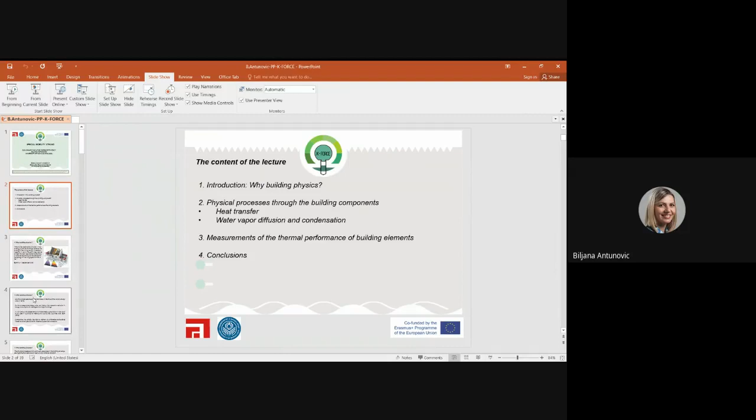Today I will speak about building physics for energy efficiency, and here is the outline of the lecture. So let's start with the explanation why building physics. Energy efficiency of buildings became an important issue in the time of the world's energy crisis in the 70s. And as the consequence, energy price was higher, what caused a reduction in energy consumption for heating and cooling of buildings. In the 21st century, the largest amount of total energy consumption in the world is still used in buildings.

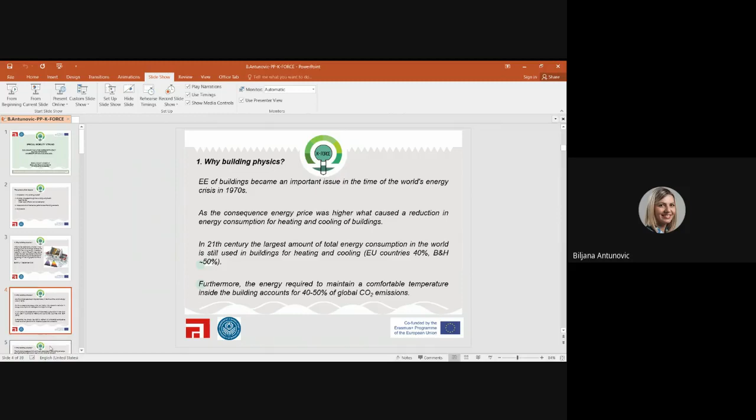Furthermore, the energy required to maintain a comfortable temperature inside the building accounts for 40 to 50% of global CO2 emission. Why building physics? The physical processes which continuously take place in the building envelope are hygrothermal loads due to heat, air, and moisture transport. If the building structures are exposed to large temperature differences and accumulated moisture, its impact on the building, users' health, and environment will be hazardous.

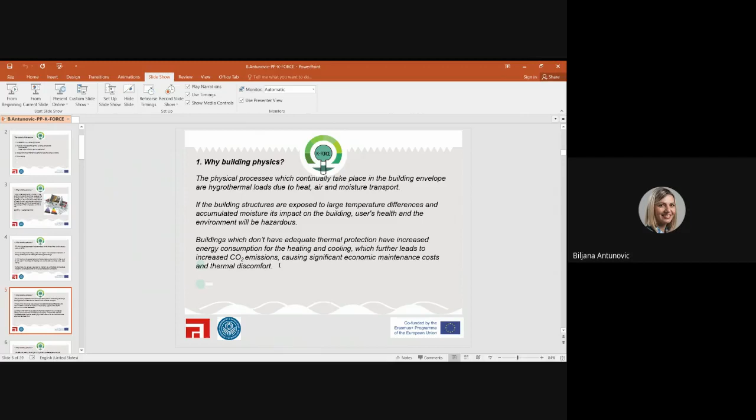Buildings which do not have adequate thermal protection have increased energy consumption for the heating and cooling, which further leads to increased CO2 emissions, causing significant economic maintenance cost and thermal discomfort. For energy efficient and healthy buildings, it is important to use adequate thermal insulation, thermal mass in the building envelope, and optimize air tightness. Applying building physics, the processes can be explained and the performance of the building constructions predicted. In case of insufficient building documentation, or in case of old buildings, the measurement of building physics quantities must be performed. Building physics becomes an imperative, not only on the engineering task list, but on the global world agenda.

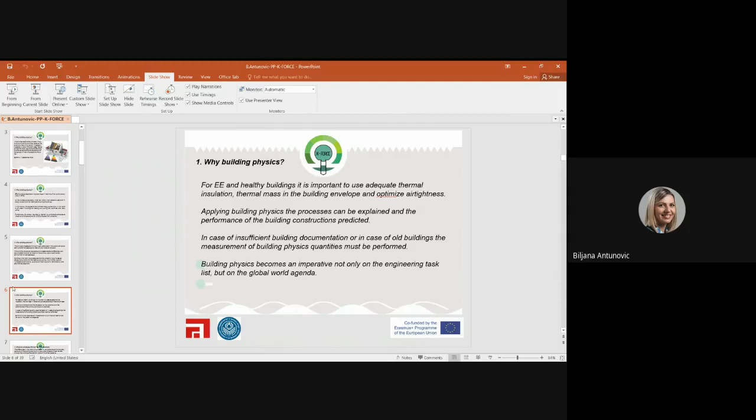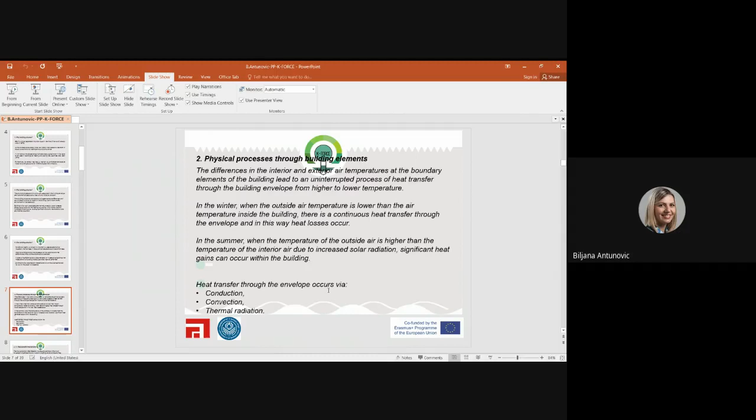Let's now say a few words about physical processes through the building elements, starting with the heat transfer. The difference in the interior and exterior air temperatures at the boundary elements of the building lead to an uninterrupted process of heat transfer through the building envelope from higher to lower temperature. In the winter, when the outside air temperature is lower than the air temperature inside the building, there is continuous heat transfer through the envelope, and in this way heat losses occur. In the summer, when the temperature of the outside air is higher than the temperature of the interior air, due to increased solar radiation, significant heat gains can occur within the building. Heat transfer through the envelope occurs via three processes: conduction, convection, and thermal radiation.

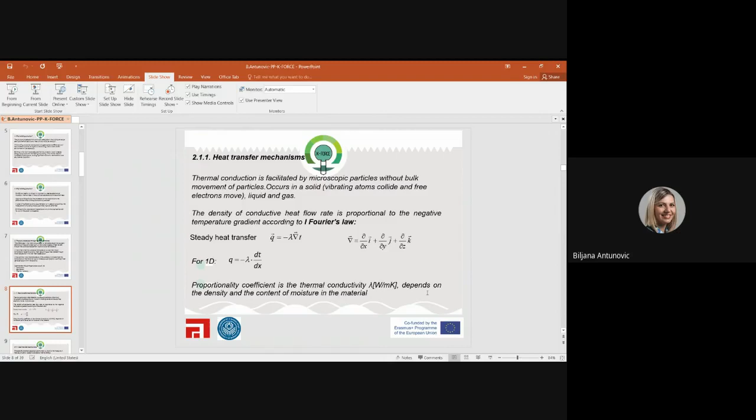Thermal conduction is facilitated by microscopic particles without bulk movement of particles, occurs in a solid, liquid, and gas. The density of conductive heat flow rate is proportional to the negative temperature gradient according to first Fourier's law, which defines a steady heat transfer via conduction. The proportionality coefficient is called the thermal conductivity. It depends on the density and the content of the moisture in the material. The specific thermal capacity is the measure of heat accumulation capability, storage of thermal energy. The larger are the specific thermal capacity and the density of the material, more thermal energy can be stored in the material.

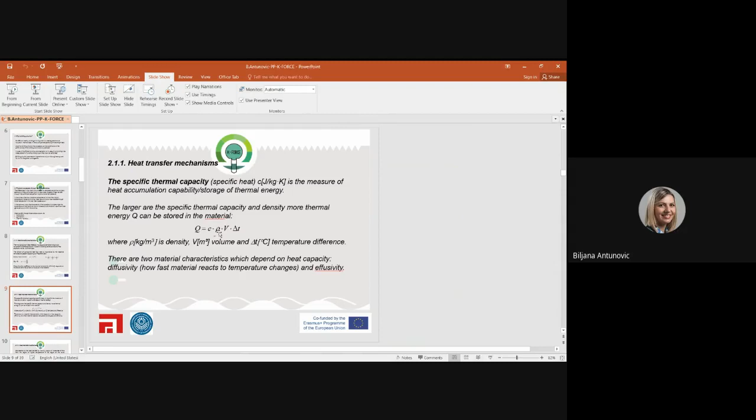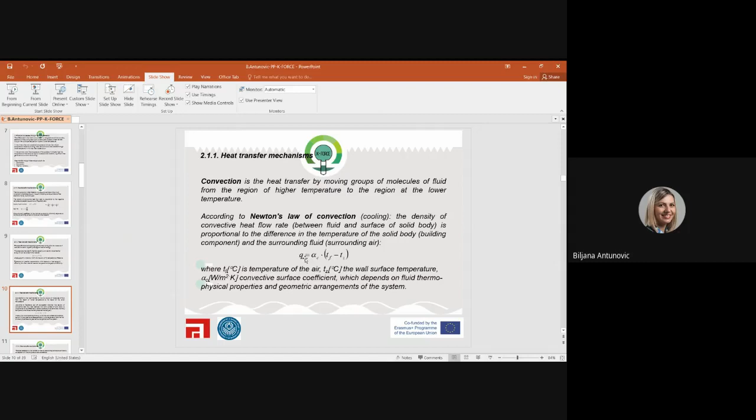Convection is the heat transfer by moving groups of molecules of fluid from the region of the higher temperature to the region at lower temperature. According to Newton's law of convection, the density of convective heat flow rate between fluid and surface of a solid body is proportional to the temperature difference. Proportionality coefficient is called convective surface film coefficient. Thermal radiation is the transfer of heat by electromagnetic waves emitted by all objects with a temperature above absolute zero. According to Stefan Boltzmann's law, the density of heat flow rate emitted from the surface at the absolute temperature is proportional to the fourth power of that temperature.

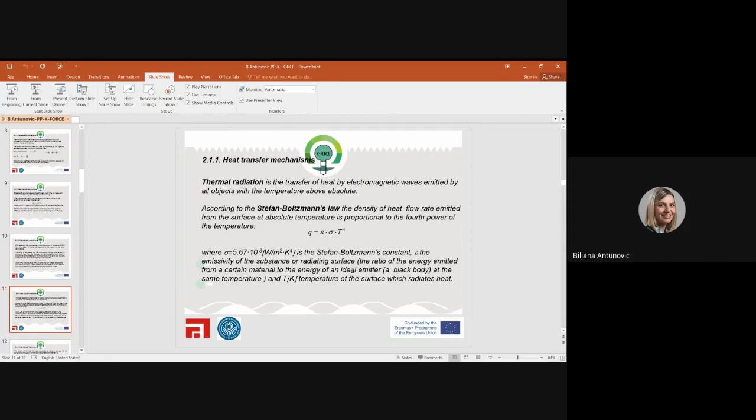Epsilon is the emissivity of the substance or radiating surface, and it's calculated as the ratio of the energy emitted from a certain material to the energy of an ideal emitter. The density of the heat flow rate transferred by radiation between the air surrounding the building element and the surface of the element can be calculated using a similar formula as we did for convection. Finally, taking into account radiation and convection, the total density of heat flow rate can be calculated using this formula, where we see that alpha is surface film coefficient, in which we have contribution from convection and radiation.

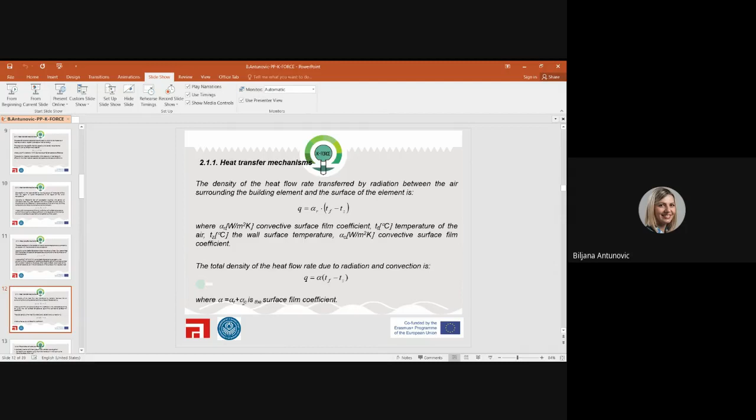In everyday practice, all three types of heat transfer occur together. First, we have convection and radiation, which occur from the internal air in the room to the internal surface of the wall. From the internal surface of the wall to the external surface of the wall, heat is transferred by conduction. And finally, convection and radiation are again processes via which heat transfers from the external wall surface to the external air. Taking all these processes into account and solving set of equations, we get the density of the heat flow rate given by this formula. As we can see, the density of the heat flow rate is proportional to the temperature difference of the internal and external air, and it's inversely proportional to this factor. The denominator here is called the total thermal resistance of the flat wall.

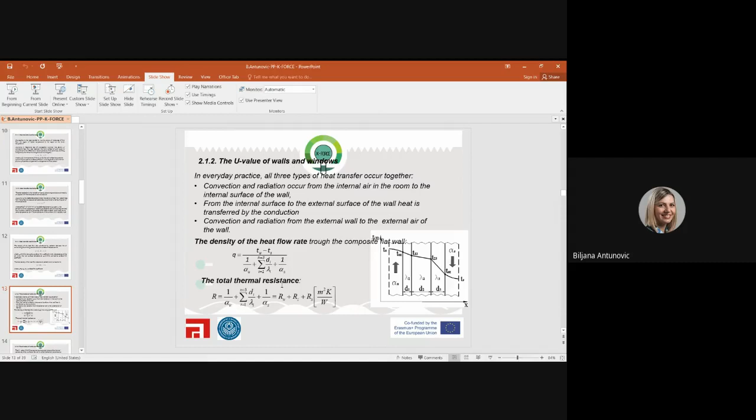Its reciprocal value represents thermal transmittance, or the U value. U value is the amount of heat transferred per unit of surface in a unit of time through the building construction element from the side of the warmer to the side of the cooler air when the difference of their temperatures is 1 Kelvin.

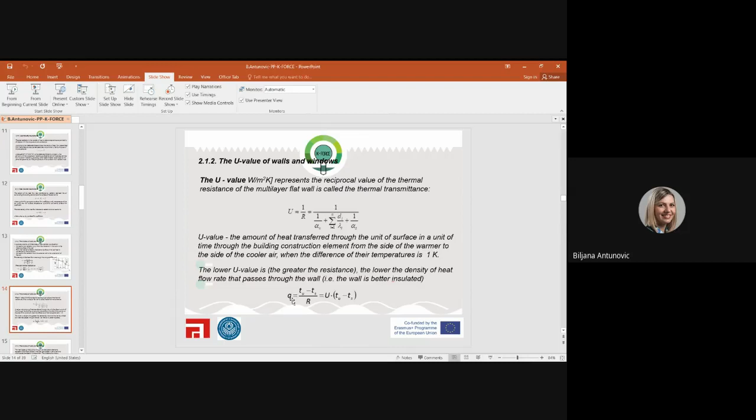The lower the U value is, or the greater the resistance is, the lower the density of heat flow rate that passes through the wall. That means that the wall is better insulated. The heat losses of the building through the transparent elements represent a significant share in the total heat losses in the winter and might cause overheating in the summer.

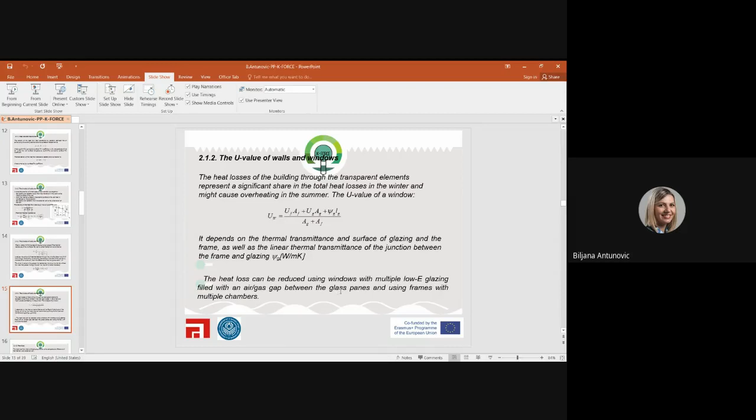The U value of a window is calculated using the following formula. As we can see, it depends on the thermal transmittance and surface of glazing and frame, as well as the linear thermal transmittance of the junction between the frame and glazing. The heat loss can be reduced using windows with multiple low-E glazing, which means low emission, filled with an air or gas gap between the glass panes, and using frames with multiple chambers.

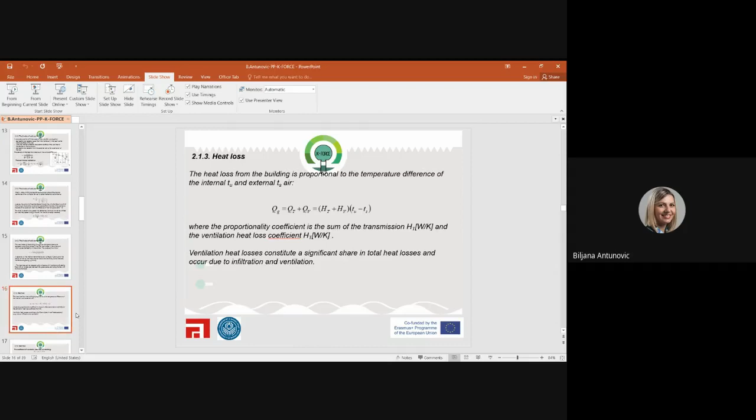The heat loss from the building is proportional to the temperature difference of the internal and external air. The proportionality coefficient, as we can see, is the sum of the transmission and ventilation heat loss coefficients. Ventilation heat losses constitute a significant share in total heat losses and occur due to infiltration and ventilation. The coefficient of ventilation heat loss can be calculated using this formula, where rho multiplied by C is constant, V is the volume, and N represents the number of air changes.

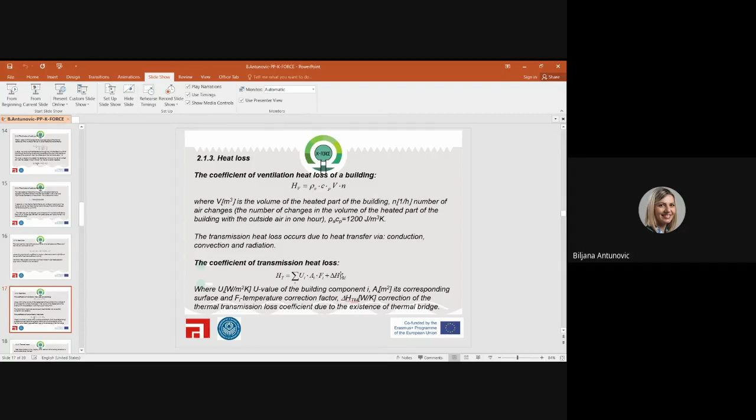The transmission heat loss occurs due to heat transfer via conduction, convection, and radiation, as we have already mentioned. The coefficient of transmission heat loss can be calculated using the following formula. As we can see, we take into account all building elements which constitute the envelope, and in addition, this transmission heat loss we have to correct for additional heat loss due to the existence of thermal bridges.

Thermal mass is also one of the important aspects when we speak about energy efficiency and building physics. Heat accumulation is the property of an element of a building structure to accumulate or store heat. This property of the element is called thermal mass. It can be quantified with two physical quantities, the time lag and the decrement factor.

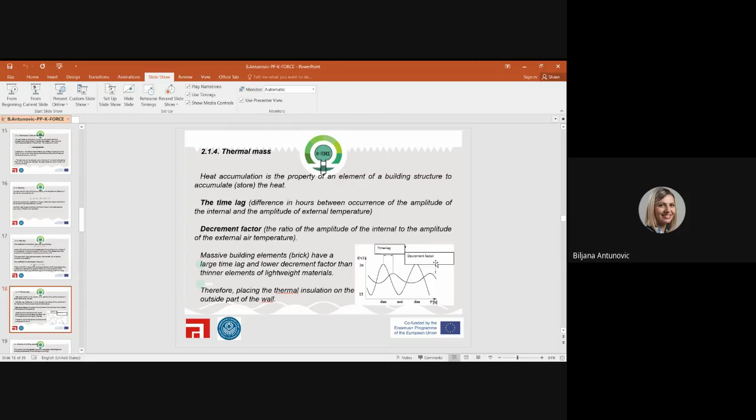The time lag is the difference in hours between the occurrence of the amplitude of the internal and the amplitude of the external temperature, while the decrement factor is the ratio of the amplitude of the internal to the amplitude of the external air temperature. It is characteristic that massive building elements have a large time lag and a lower decrement factor than thinner elements of lightweight materials. Therefore, we place the thermal insulation on the outside part of the wall in order to have an adequate thermal mass of a building element.

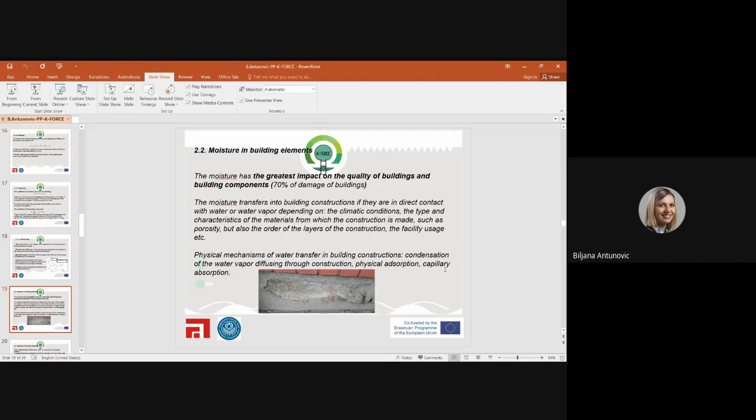An important problem in buildings, which causes more than 70% of damages of buildings, is moisture. The moisture transfers into building constructions if they are in direct contact with water or water vapor. And there are three physical mechanisms of water transfer. Today, we will discuss condensation of water vapor diffusing into the construction.

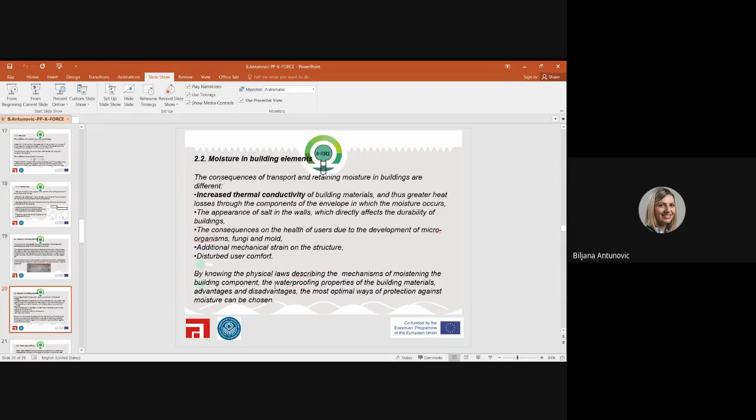The consequences of transport and retaining moisture in buildings are different: increased thermal conductivity, the appearance of salt in the walls, consequences on the health and comfort of users, and additional mechanical strain on the structure. By knowing the physical laws describing the mechanisms of moistening a building component, and the waterproofing properties of the building materials, their advantages and disadvantages, the most optimal ways of protection against moisture can be chosen.

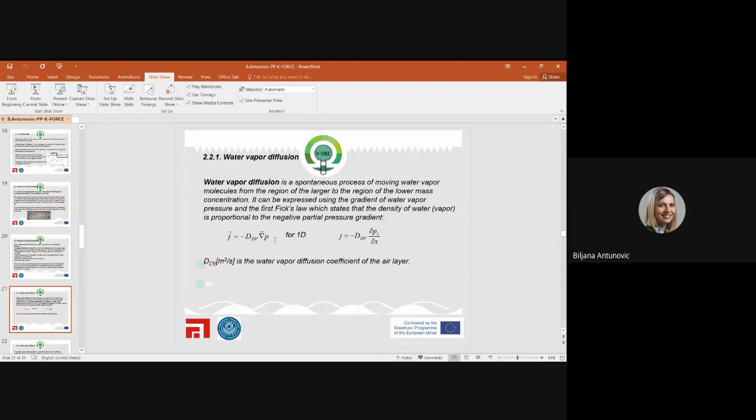Water vapor diffusion is a spontaneous process of moving water vapor molecules from the region of the larger to the region of the lower mass concentration. It can be expressed using the gradient of the water vapor pressure and Fick's first law, which states that the density of water vapor flow is proportional to the negative partial pressure gradient. The water vapor resistance factor represents the ratio of the diffusion coefficient of the air layer and the diffusion coefficient of the construction material of the same thickness at the same temperature. It determines the hydro-insulating properties of the material and depends on its structure.

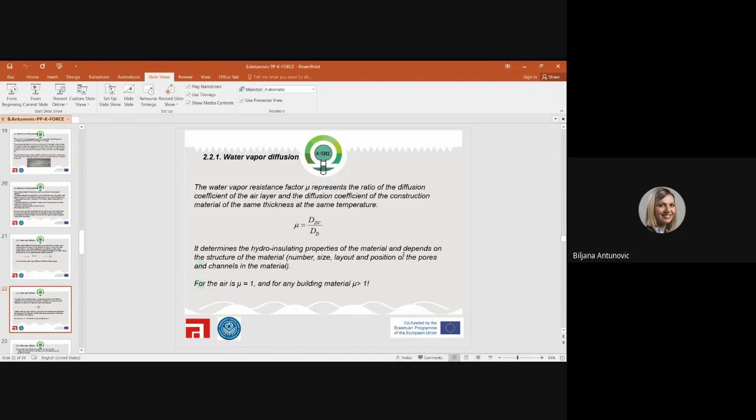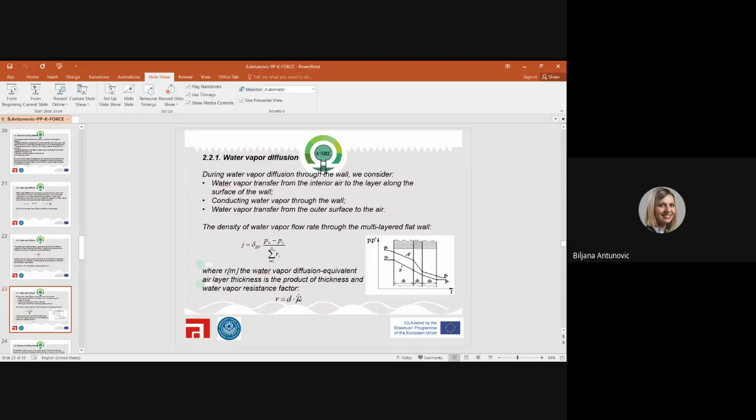During water vapor diffusion into the wall, we consider water vapor transfer from the interior air to the layer along the surface of the wall, then diffusion into the wall, and finally water vapor transfer from the outer surface of the wall to the outer air. Solving the set of equations which describe these processes, we get the density of water vapor flow rate through the multi-layered flat wall. It's proportional to the difference of partial pressures of internal and external air, and inversely proportional to the water vapor diffusion equivalent air layer thickness. We can calculate this quantity as the product of the thickness and the water vapor resistance factor.

Condensation usually occurs in the winter period in structures where the sequence of layers of embedded materials, taking into account their thickness and the conductivity of the water vapor, is not adequately chosen, as, for example, when the thermal insulation material is placed on the inner part of the wall. It's determined by calculation whether the water accumulated during the humidification period of the structure will dry out during the summer or evaporation period. In this case, we consider that condensation is allowed. If that is not the case, then some design measures and changes to the design documentation are needed.

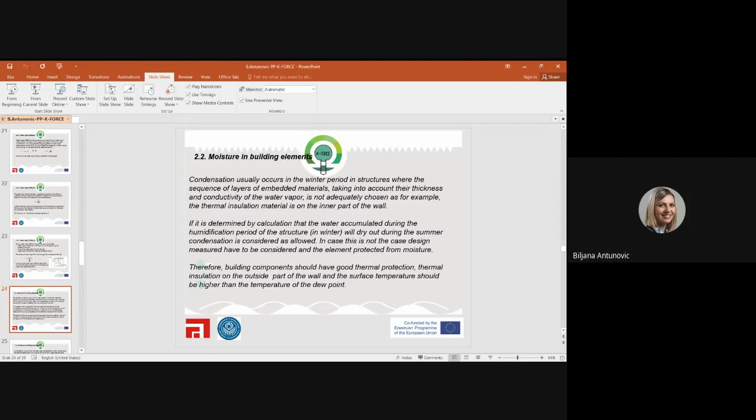Therefore, building components should have good thermal protection, thermal insulation on the outside part of the wall, and the surface temperature should be higher than the dew point temperature. The dew point is the temperature at which the water vapor condenses. At that point, the relative humidity of the air is 100%, and the partial pressure of the water vapor is equal to the saturation pressure.

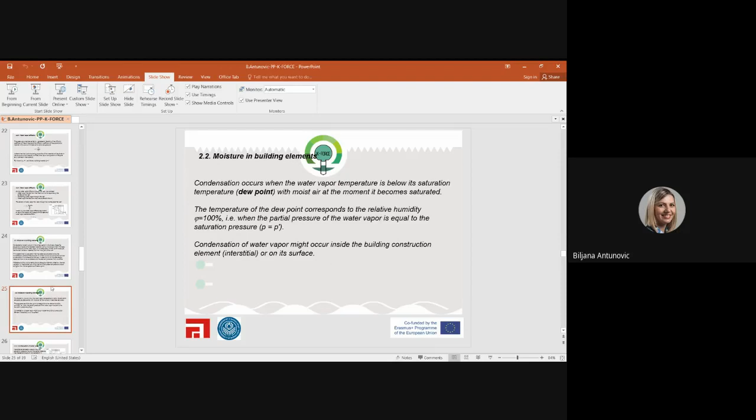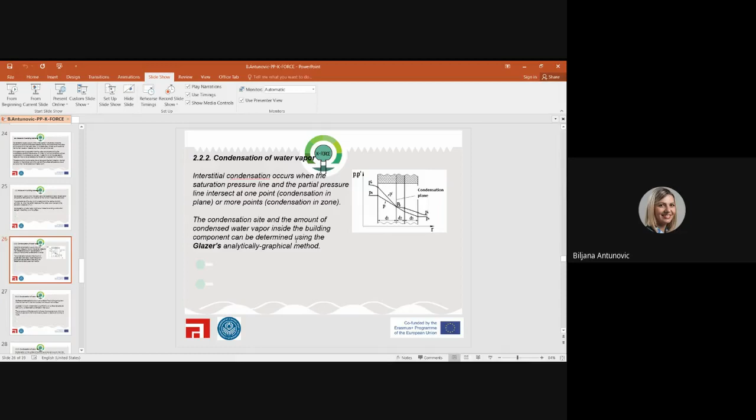Condensation of water vapor might occur inside the building construction element or on its surface. In the case of condensation inside the building element, so-called interstitial condensation, it occurs when the saturation pressure line and the partial pressure line intersect at one point, when we have condensation in a plane, or at more points, when we have condensation in a zone. The condensation site and the amount of condensed water vapor inside the building component can be determined using Glaser's analytically graphical method.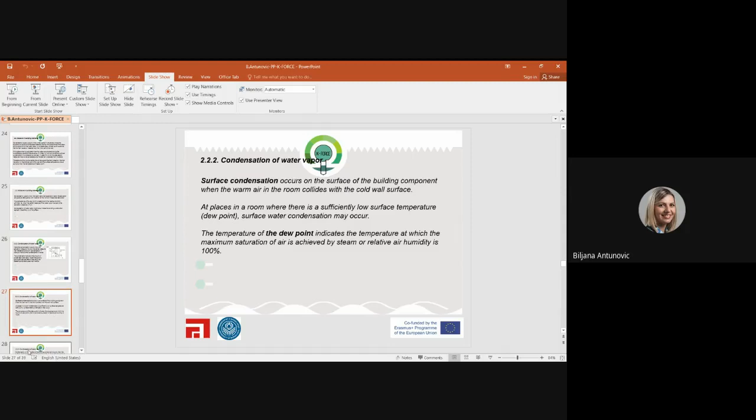Surface condensation occurs on the surface of the building component when the warm air in the room collides with the cold wall surface. At places in a room where there is sufficiently low surface temperature, which means the dew point, surface water condensation may occur. The temperature of the dew point indicates the temperature at which the maximum saturation of air is achieved, and relative humidity is 100%. Condensation on the surface of the building component is an important issue in building physics. One of the criteria which must be kept independently of other requirements is minimum thermal resistance, which can be calculated for any building component.

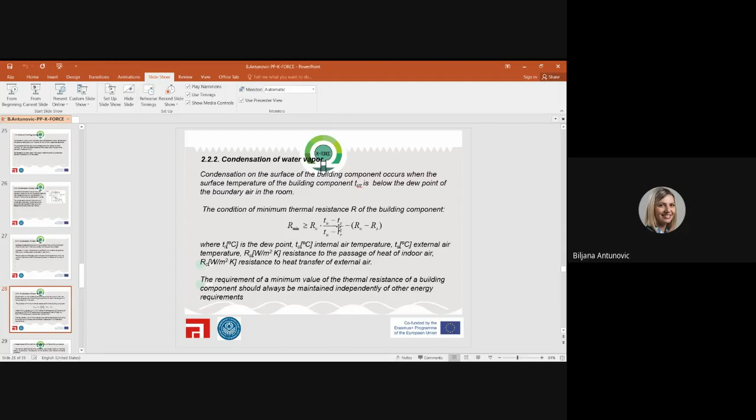The thermal performance of the envelope has a large impact on the total energy consumption, as we have seen, the economy of the building, and environmental protection. The methods recommended for calculation of physical quantities given in standards and used in national regulations are largely based on the assumption of an ideal construction, although some minor corrections of the value are predicted for certain cases. The problem that engineers face is missing or incomplete design documentation. Another problem is that the construction materials might change their properties with time, for example, due to the moisture present in porous material. Therefore, measurements of thermal characteristics of the envelope should be performed.

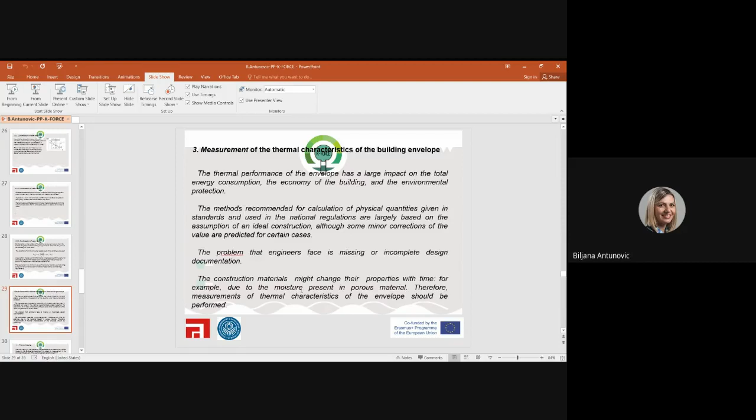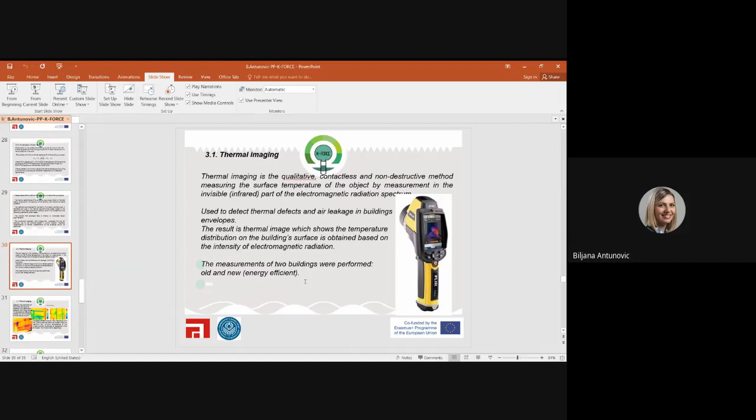Thermal imaging is a qualitative, contactless, and non-destructive method of measuring the surface temperature of an object by measurement in the invisible part of the electromagnetic radiation spectrum. It is used to detect thermal defects and leakages in buildings or actual building envelopes. As the result, we get a thermal image. Here we will show measurements for two buildings. For the new building, no serious problems were observed, but for the old building, as we can see, there are two different problems. There is moisture present in the building, and therefore there are defects in temperature distribution, and also there is increased infiltration of air.

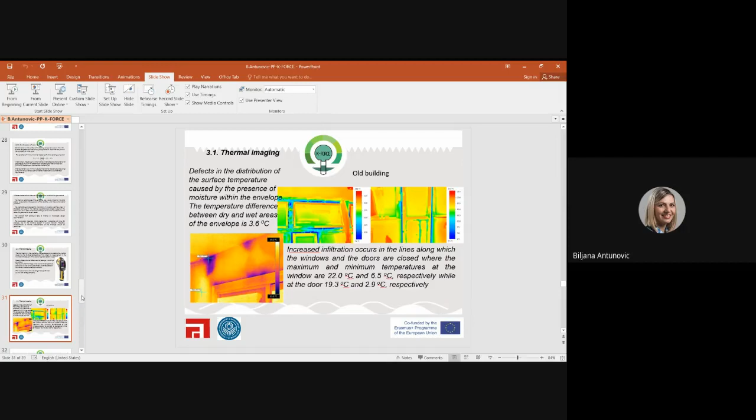In accordance with the international standard, the U value can be calculated under the assumption that the sequence, thickness, and structure of used materials are known and that the construction is ideal. The measurement of the U value on site and under the actual conditions in which the building is used takes into account different irregularities and the degradation of the structural elements. For some older buildings, the problem is that the thickness and thermal characteristics of embedded materials are incomplete, or the properties of the material have changed over time.

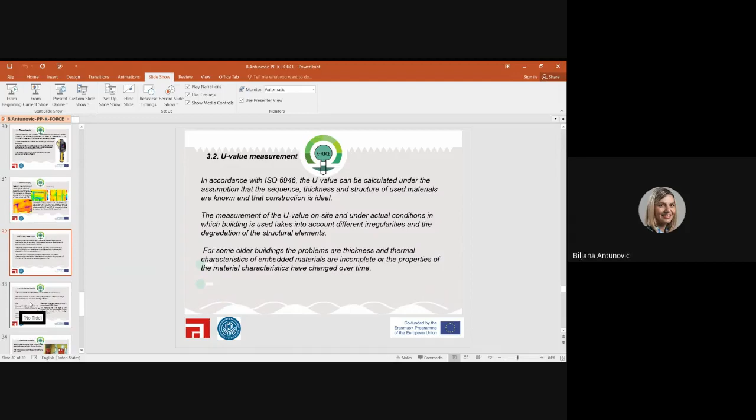Here are the measurements of the U value for two different buildings, the old one and the new one, which is energy efficient. As we can see, for the energy efficient building, the measurements of the U value are in quite good agreement within the error. However, for the old building, the measured U value is approximately 28% higher than the design value. The reasons are the age of the building and the completeness of the information stated in the design documentation.

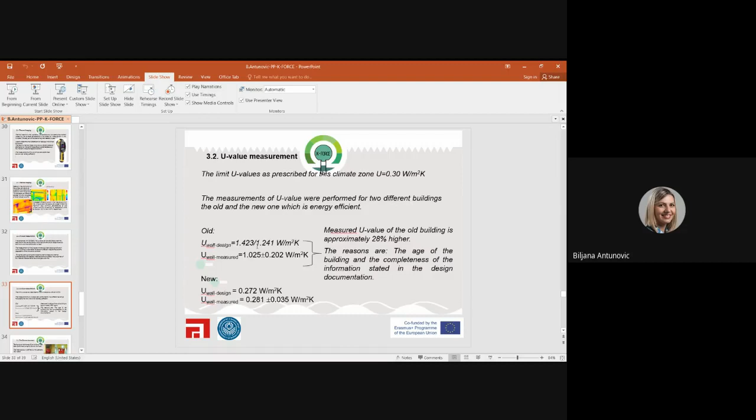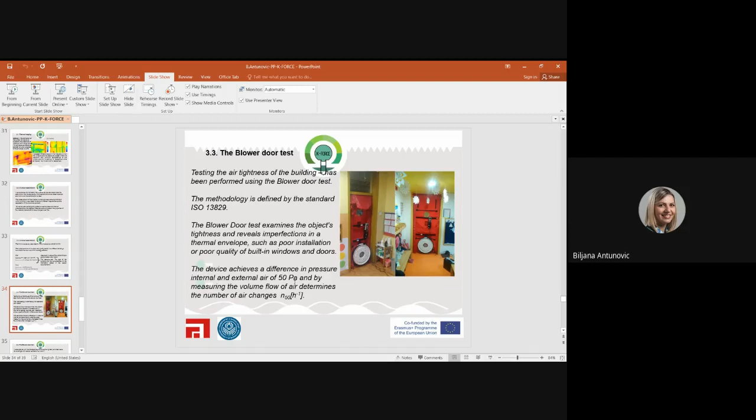Another measurement which can be performed is the testing of air tightness of the building using the blower door test. The blower door test examines the object's air tightness and reveals imperfections in the thermal envelope, such as poor installation or poor quality of built-in windows and doors. The device achieves a pressure difference between internal and external air of 50 pascals, and by measuring the volume flow of air, determines the number of air changes. Again, for two representative buildings, we have measured the air infiltration. For the new energy efficient building, air tightness was satisfactory according to rule book requirements, which prescribe the highest permitted value for buildings with natural ventilation. For the old building, this was not the case, and the measured value is about 3 times higher than it should be.

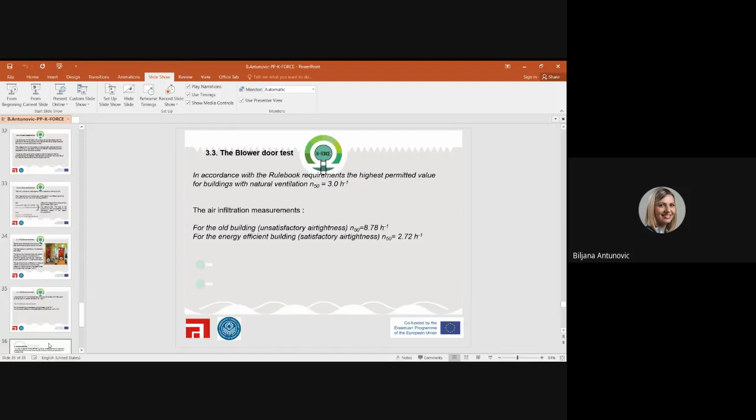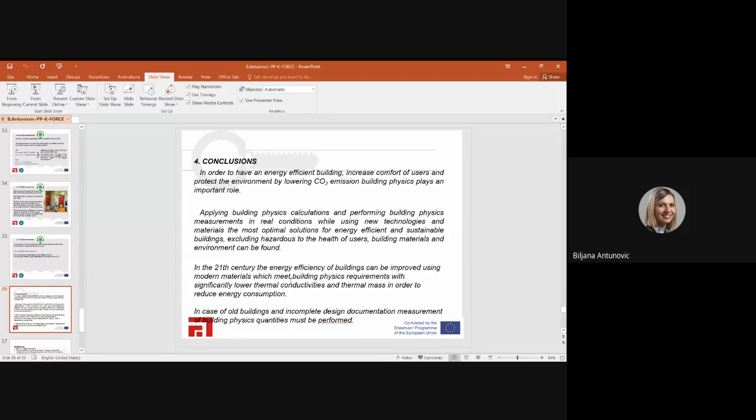Conclusions. In order to have an energy efficient building, increase comfort of users, and protect the environment by lowering CO2 emission, building physics plays an important role. By applying building physics calculations and performing building physics measurements in real conditions while new technologies and materials are used, the most optimal solutions for energy efficient and sustainable buildings, excluding hazards to the health of users, building materials, and the environment, can be found. In the 21st century, the energy efficiency of buildings can be improved using modern materials, which meet building physics requirements with significantly lower thermal conductivities and thermal mass, which is appropriate in order to reduce energy consumption. In the case of old buildings and incomplete design documentation, measurements of building physics quantities must be performed.